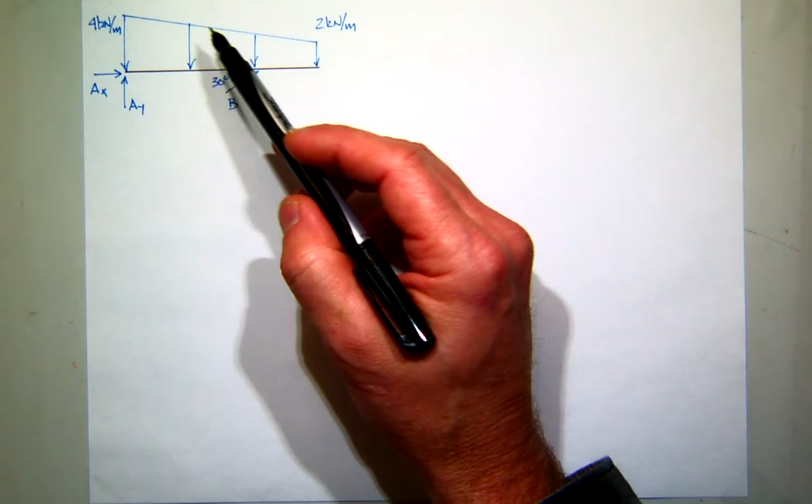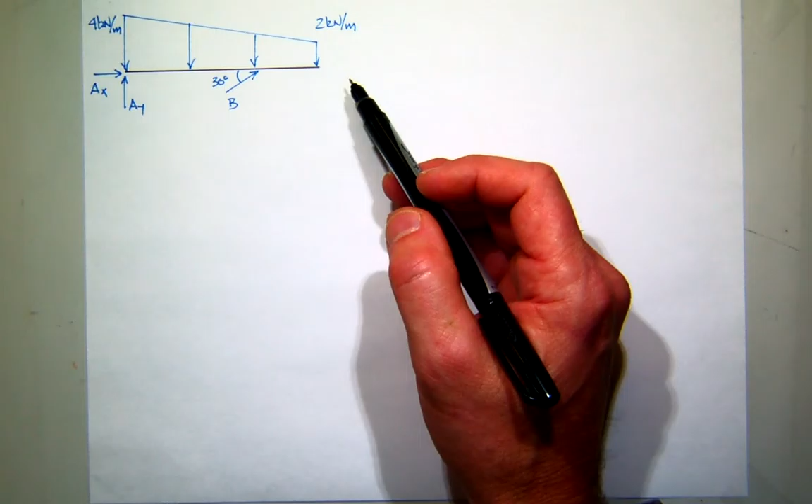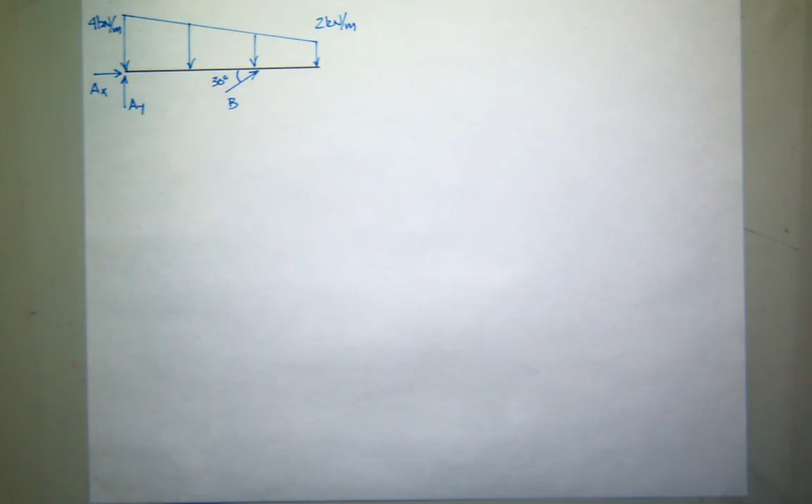Now I need to take this distributed load and get a concentrated force, equivalent concentrated force, to help do my analysis. Now, if you decide to do the whole load as one piece, a trapezoid, it's not hard to find the area of a trapezoid. Off the top of my head, though, I cannot remember where the centroid of a trapezoid is. So I think an easier way to look at this problem would be to break it up into two pieces.

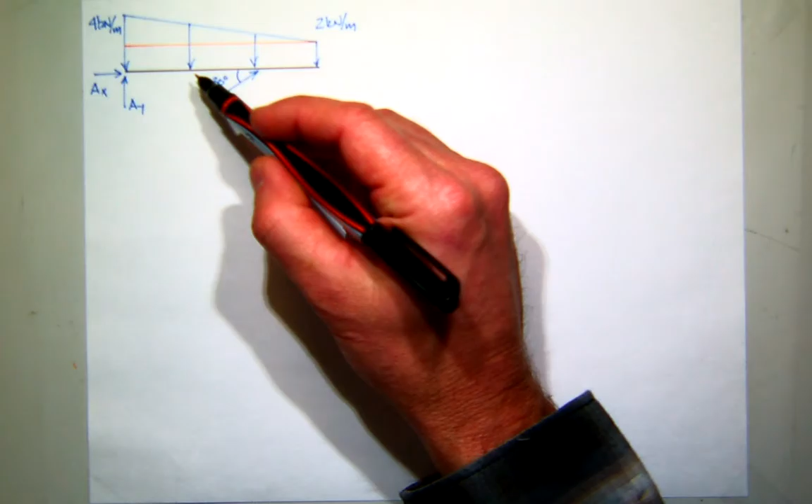One piece is rectangular and one piece is triangular. I still know very easily the area of a triangle, the area of a rectangle. I also know that the centroid of a rectangle is right in the middle, and the centroid of a triangle is 1/3 the distance from the taller, the bigger end. So those are things I think you probably remember and could use to your advantage.

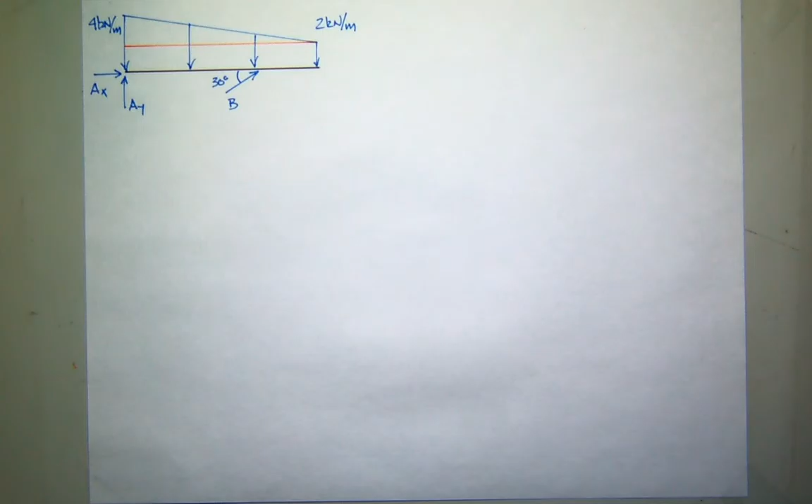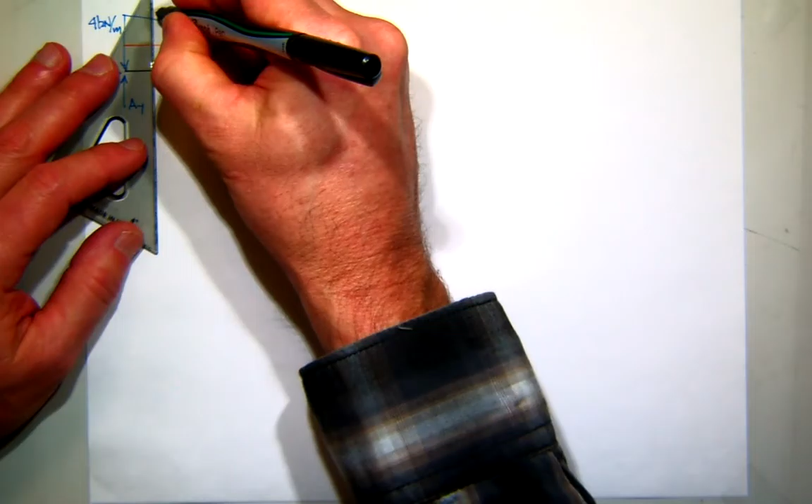So with that said, let's find those concentrated forces. So the rectangular force, the equivalent rectangular force, I'll just call that F1, and then there'll be also one for the triangle. I'll call that F2. So what is F1?

Oh, I left off the distances. The distances are, this is 6 meters, and this little overhang is 3. Yeah, you need that information.

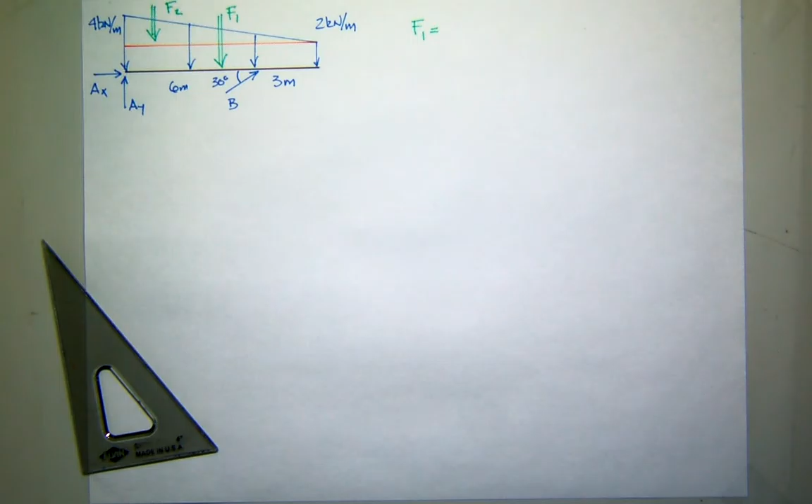Okay, so now, what are those values? Okay, it's 2 kilonewtons per meter times 9, right? So that should be 18. So I got 18 kilonewtons for that one.

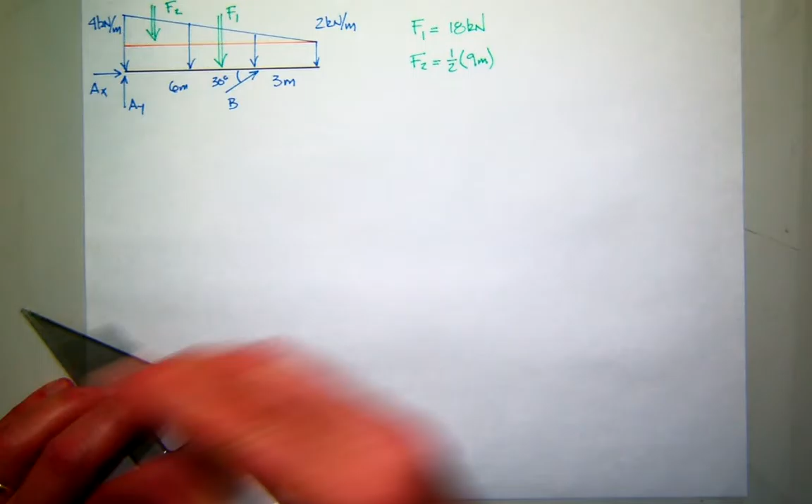What about F2? That's a triangle, so it's 1/2 the base, which is 9 meters. And what's the height of this triangle? 2. So that's 2 kilonewtons per meter. And if we add all that up, it looks like it's 9.

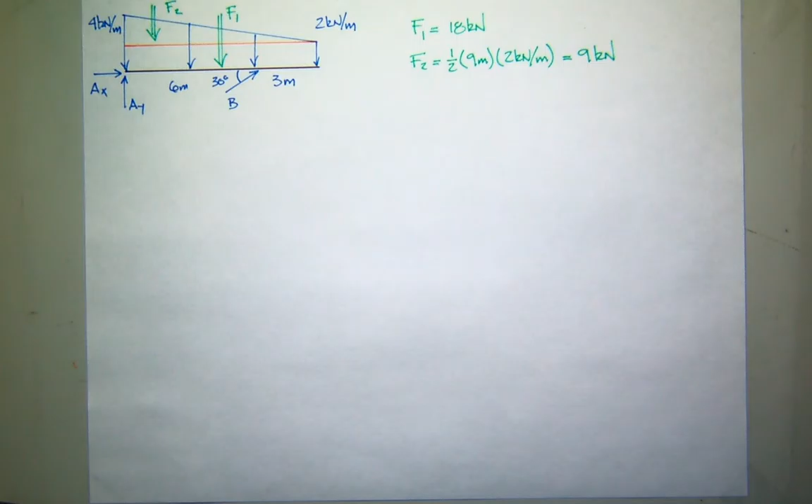Okay, now applying my equilibrium to this problem, where's a good place to start? With my 3 equations of equilibrium. Let me pose a problem: should we sum forces in the y direction first? Well, if we did, we would have AY plus the y component of B, 2 unknowns, balanced by these y forces. That's one equation, 2 unknowns. Can't solve it. What about sum forces in X?

Exactly the same. So your best bet is to sum moments about some point where a lot of your forces are concurrent. That's probably going to be this pin. So if I sum moments about A, I should be able to solve for B, and then I can sum forces X, sum forces Y. So that's going to be our strategy.

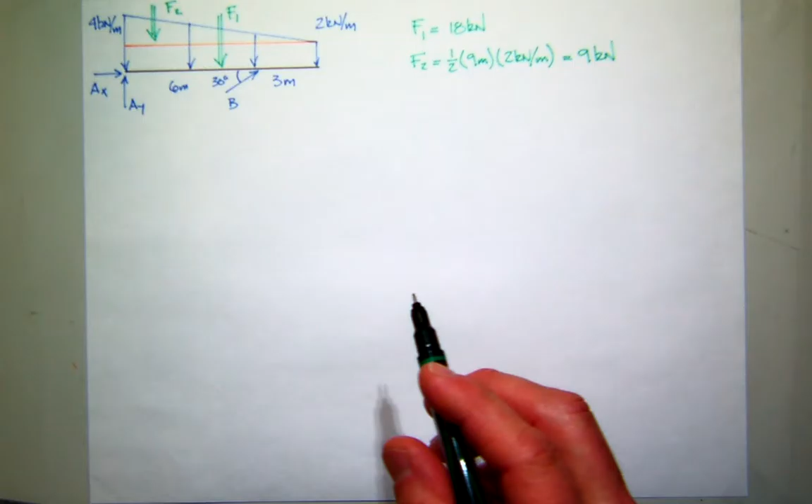So since I'm going to sum moments about A, I'm going to need the distance from A to these forces. I'll call that D2, and I'll call that D1. So what's D1? What's the distance from A to the centroid of the rectangular force? 4.5, half the distance. What about D2? Yeah, it should be 1/3 of that, should be 3.

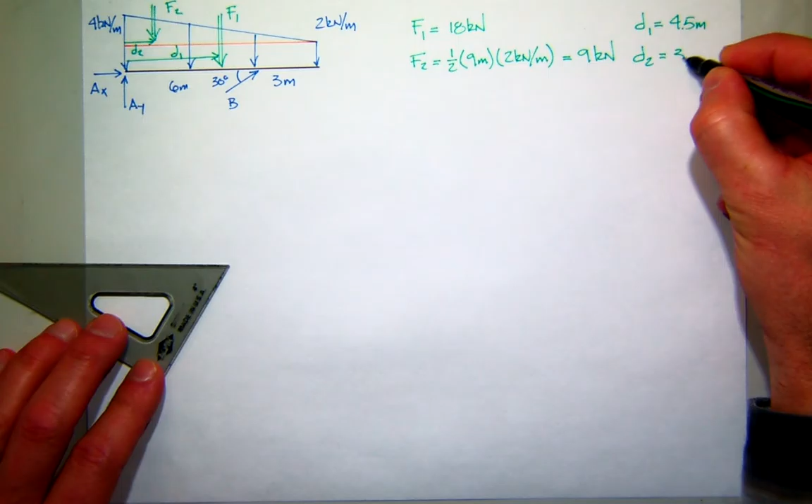So it looks like I have all the pieces I need. So I'm going to start by summing moments about A, make sure it's in equilibrium, and I always use the right-hand rule for my sign convention. Counterclockwise is positive. You can use whatever you like, but that's what I'm going to do up here. If you want to follow along, that's what I'm going to do.

So starting with that, let's look at all my applied forces, both F1 and F2. Are they going to be positive or negative moments? With my counterclockwise is positive, they're all going to be negative. So I'll start with F1. F1 is going to be negative 18 kilonewtons times its moment arm, which is D1, which is 4.5 meters. And then F2 is also a negative moment of 9 kilonewtons with a moment arm of 3.

Now, how do I account for B? I think you want to break B up, right? You're going to have a vertical component I'll call BY, and a horizontal component. That's going to be a little harder to see in there. I should have made a little more room, BX.

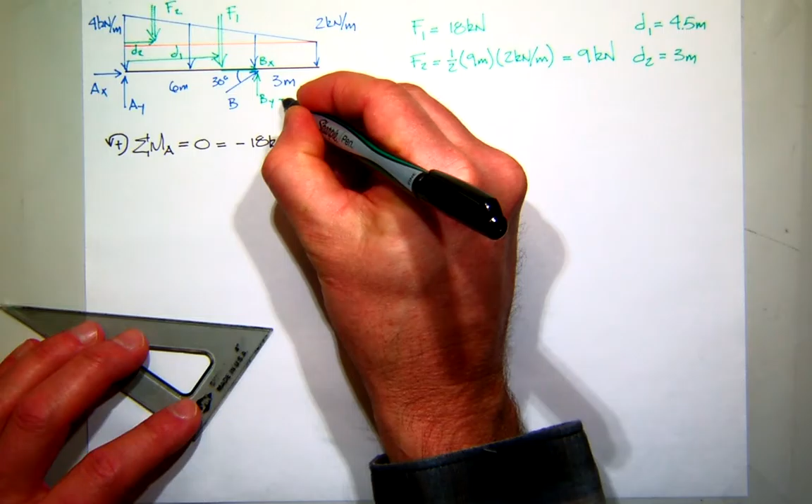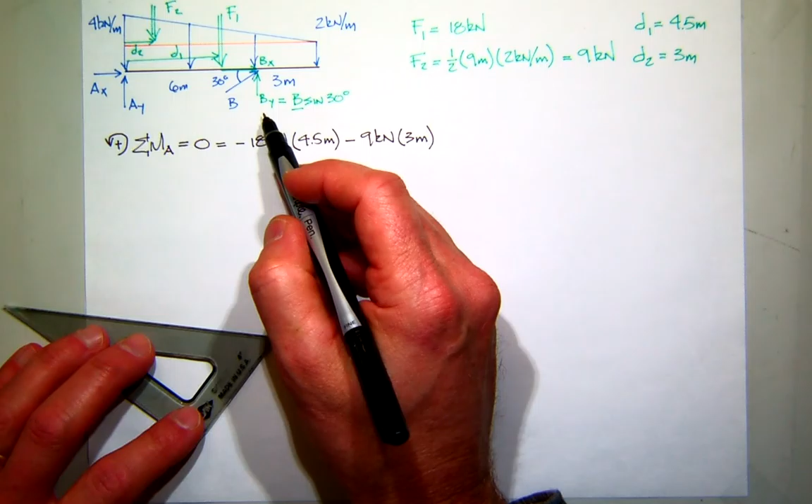So what is BY? What's BY equal to? It's going to be B sine 30, right? So again, I'm back to just that one unknown. So what's the moment arm for that? Oh, first of all, is BY going to create positive or negative moment? Positive. So I'm going to have plus B sine 30, that's the force, and the moment arm?

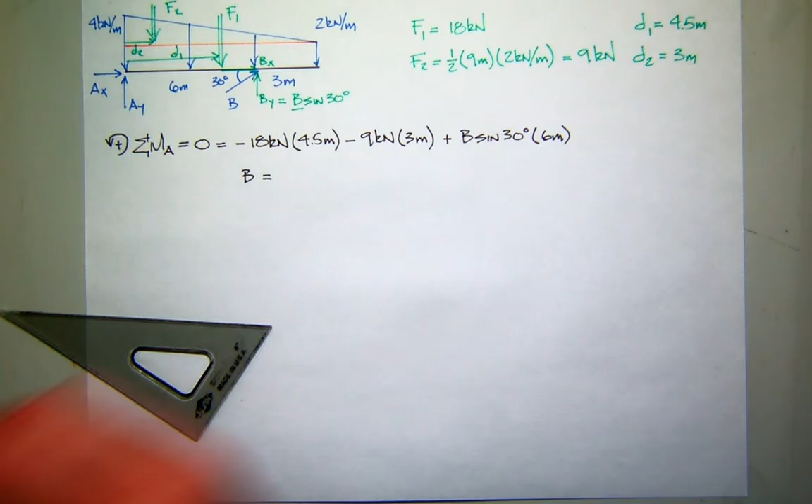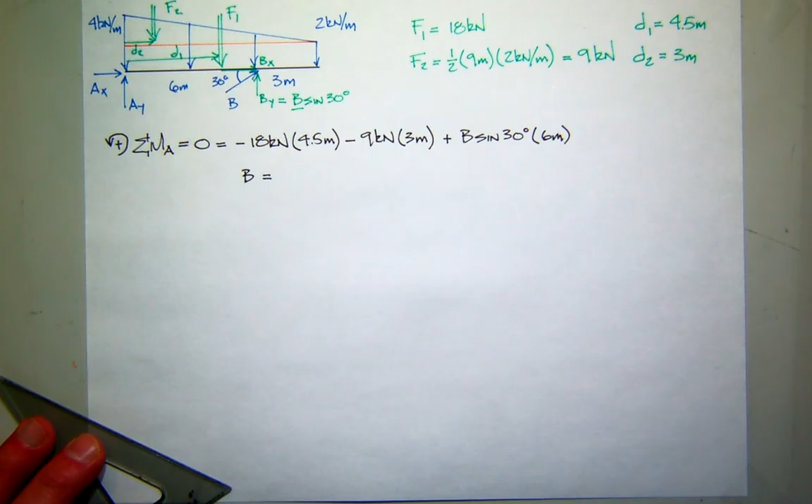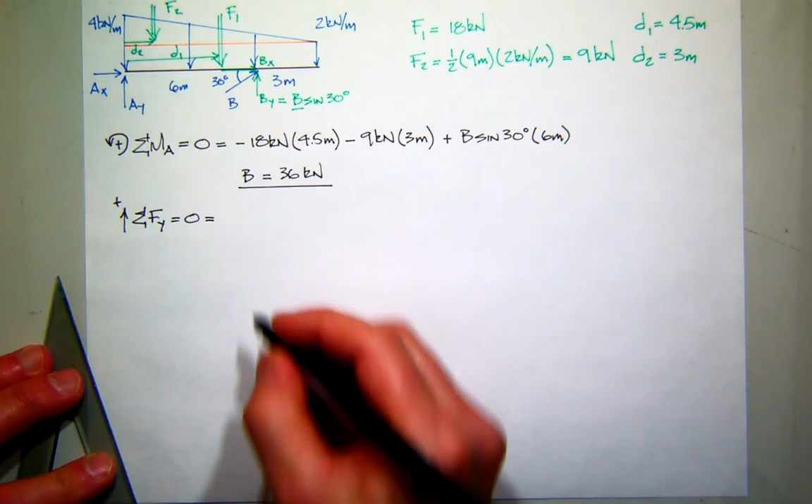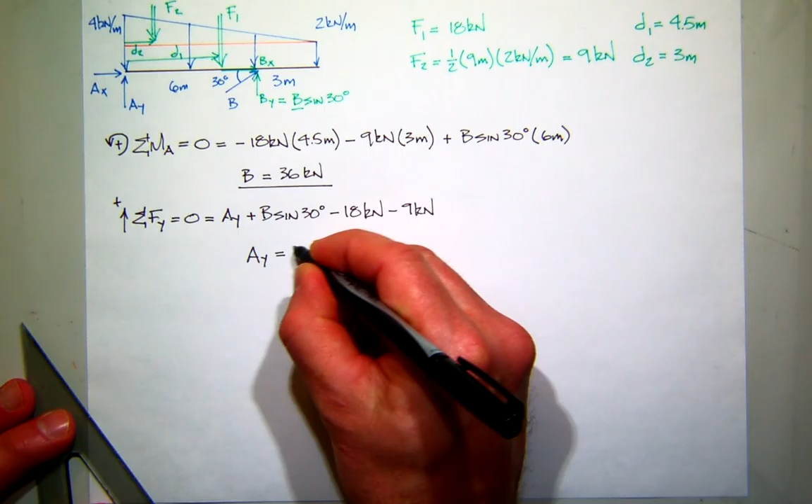I don't know, I got 36. 36? Even? Anybody else get 36? Okay, 36? Sounds good. So it's 36 kilonewtons. So I got a positive value, so I chose the right direction for B. Your next step could go either way: sum forces x, sum forces y. I'll just sum forces in the y direction first. So I'll assume up is positive. So I'll sum forces in the y direction, make sure they're in equilibrium. So what do I have in the y direction? I've got AY acting up. I've got BY also acting up, which is B sine 30. And then I have my two forces, F1, F2 acting down. So that's 18 and 9. So what's AY equal to? 9? Anybody else get 9? Confirmation? Yes? And again, got a positive value, so I assume the right direction.

And then finally, summing forces in the x direction, I'll assume to the right is positive. So looking at my free body diagram, I have AX plus the x component, which I didn't write before, but that's going to be B cosine 30. And anything else in the x direction? No. So what's AX? Negative what? 31.2. 31.2? So there we go.

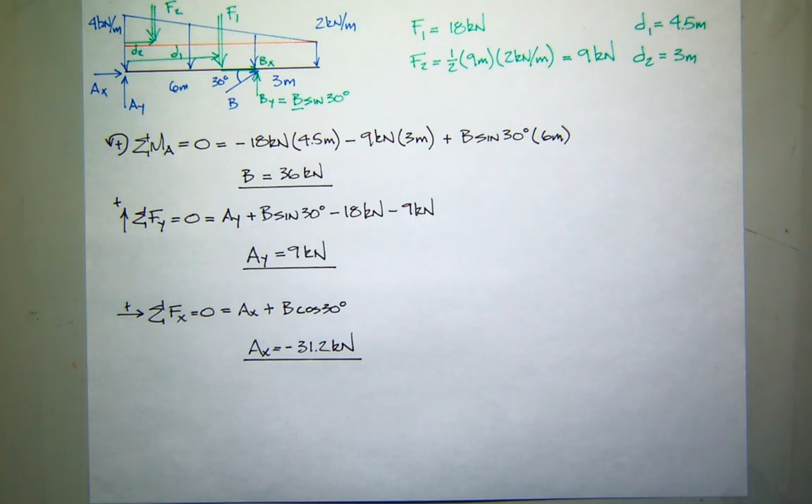So any questions about that one? Pretty straightforward, I think. Is that one out of the book, or is that just in the notes? No, I think I pulled that out of my notes. Okay, so I'll stop here.